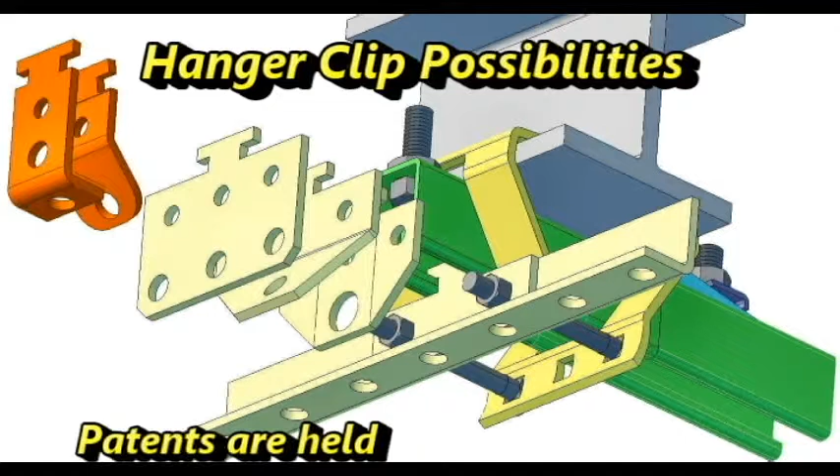The engineers of NuClamp have developed a number of construction attachment devices that provide many new solutions for making connections to steel members. Most applications are found inside of steel structures. NuClamp products save labor and provide many new solutions to attachment challenges. These are all based on patents that we have been awarded.

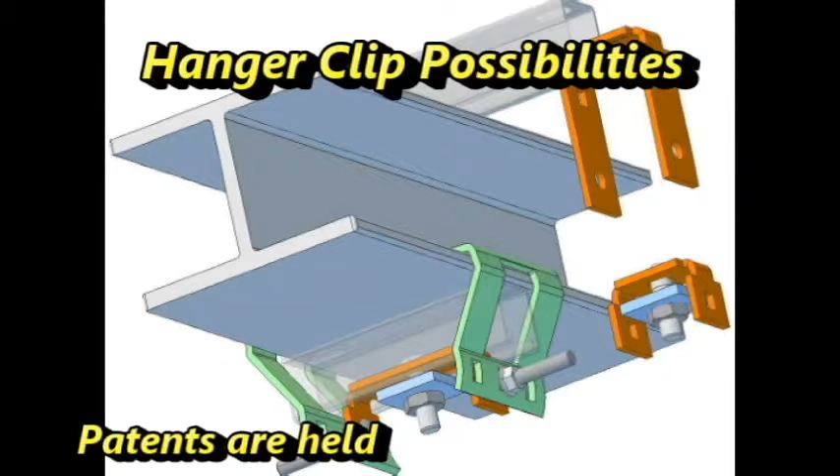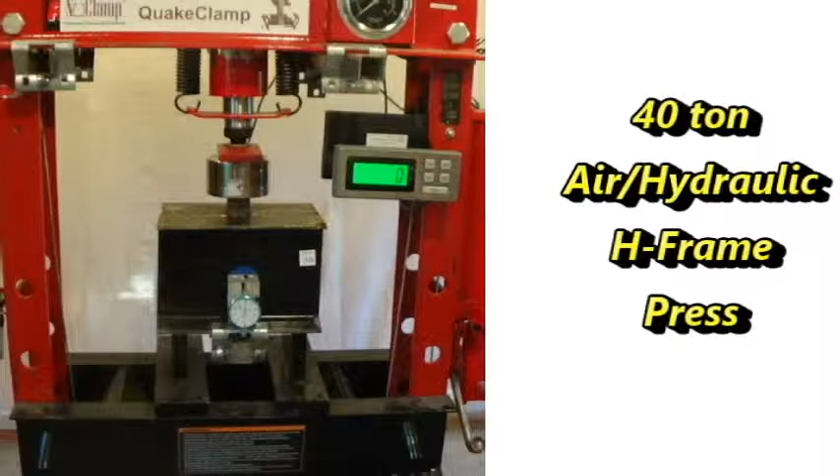The following video is one of a series that features the testing and options for use for the different NuClamp products and attachment configurations. As part of this video, new and better methods for hanging and attaching members to steel beam structures are presented. These are made possible by combining our beam QuakeClamp along with our new family of hanger clips. For testing, we use a 40-ton air-over hydraulic H-frame press along with a number of special fixtures to apply forces that best emulate real-world loads.

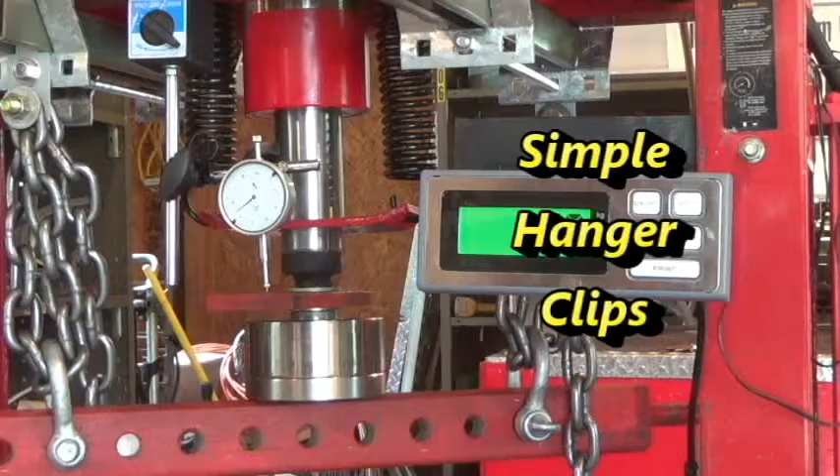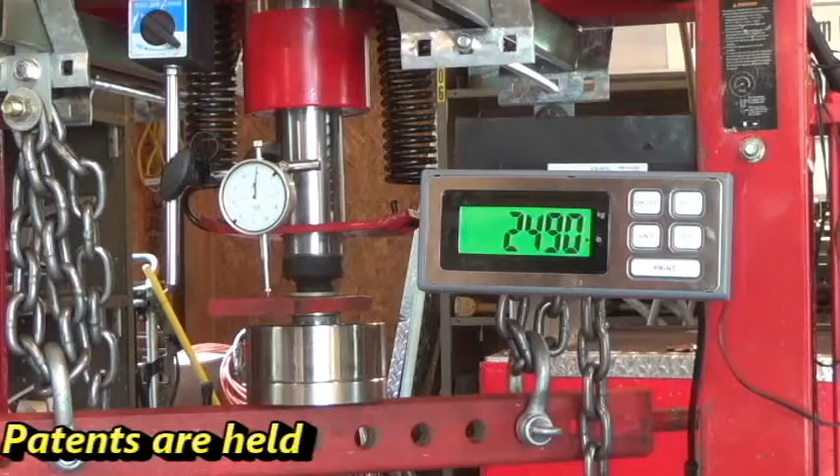We use a newly calibrated 50,000-pound load cell attached to the press ram. A digital readout displays the force. This is seen on the right side of the load cell. Dial indicators show movement. We maintain a complete video record of all tests with pounds of force recorded at each 10/1000ths of an inch movement. Data from the videos are charted and graphed in Excel workbooks.

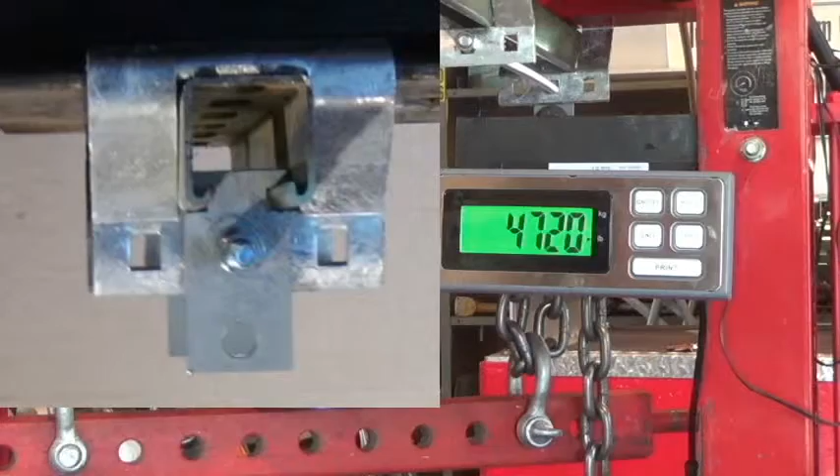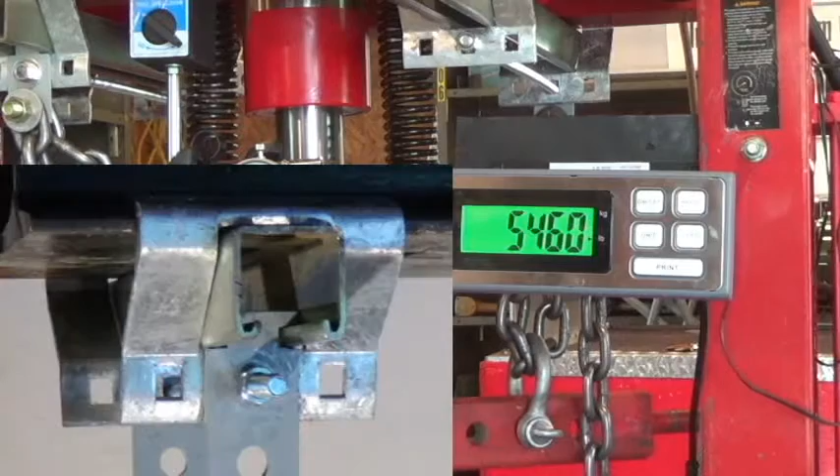This test is part of a series for our single strut QuakeClamp. This video shows how our simple hanger clip provides a strong loading capacity when used with a short or long piece of strut channel secured by our QuakeClamps. One bolt is all that is needed to attach the small size hanger clip to near the edge of an I-beam. Small does not mean light duty. The smallest hanger clip shown will support the full load of one side of the clamp assembly. We also will show more complex devices that extend the hanger clip's function.

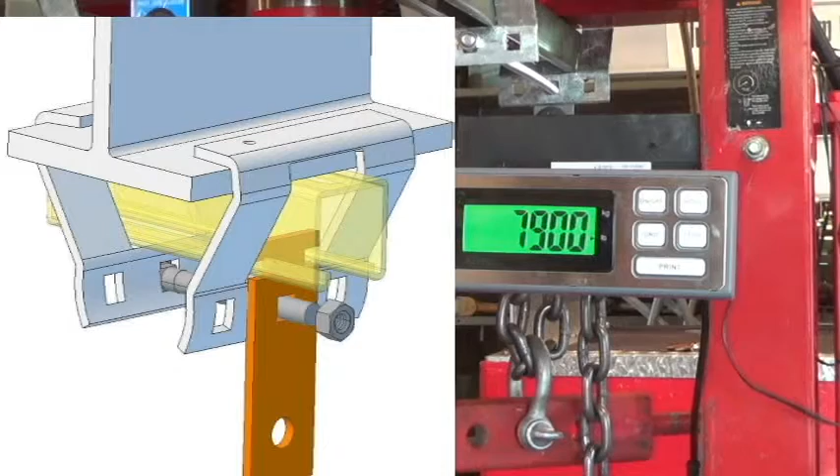In this first test, we inserted the notched end of the clip in the strut channel. The bolt passing through the center hole of the clamp that connects the two sides of the clamp together captures the hanger clip against the outside of the clamp. The load is mostly carried by the inside of the strut channel, which is held by the quake clamp. The inside of the clamp also contains the strut, so it does not deform where the hanger clip is positioned. One bolt on the hanger assembly holds as much as one side of the quake clamp.

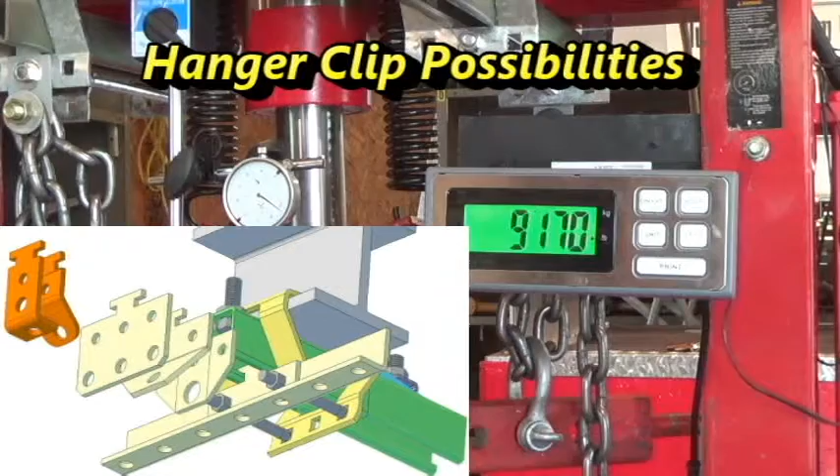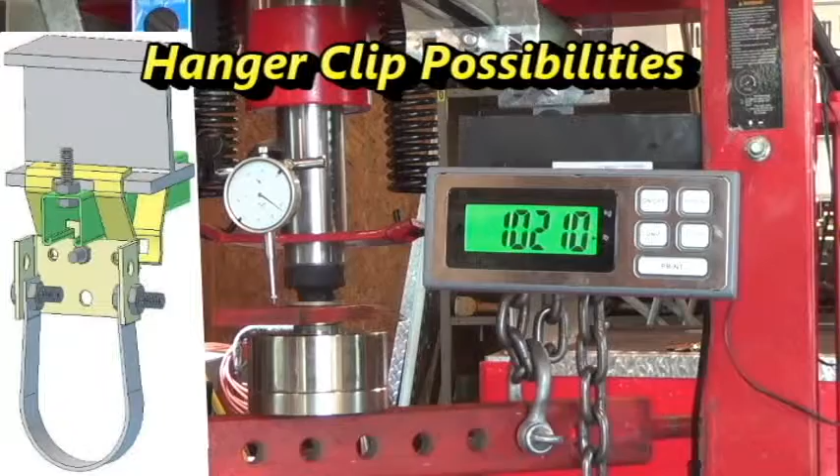Our testing showed an ultimate failure load of 12,800 pounds for two ends. This translates to 6,400 per flange side. A hanger clip that uses two bolts through the clamp provides more stability for loads to one side or the other. Special hanger clips are easy to manufacture to meet special needs. In other videos, we show ways to stop most sliding across the I-beam. This opens up new ways for attaching bracing as well as other opportunities for solutions for hard-to-solve problems.

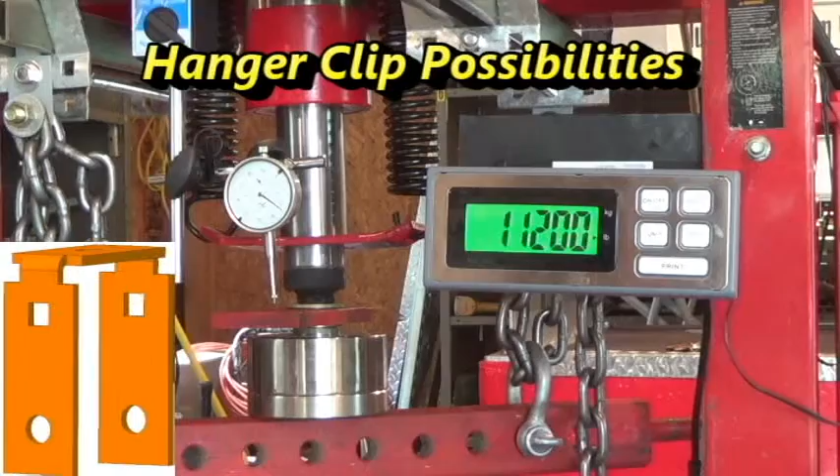In the test videos, the movement of the ram is displayed on dial indicators. The load in pounds is recorded on a spreadsheet at each 10/1000ths of an inch movement. In this test, the force is applied to a bar that pulls down on two hanger clips at one time. The measurements displayed are for two clips. While these clips were installed on separate strut channel, the same results would appear if one strut was used with a hanger on each side of the beam.

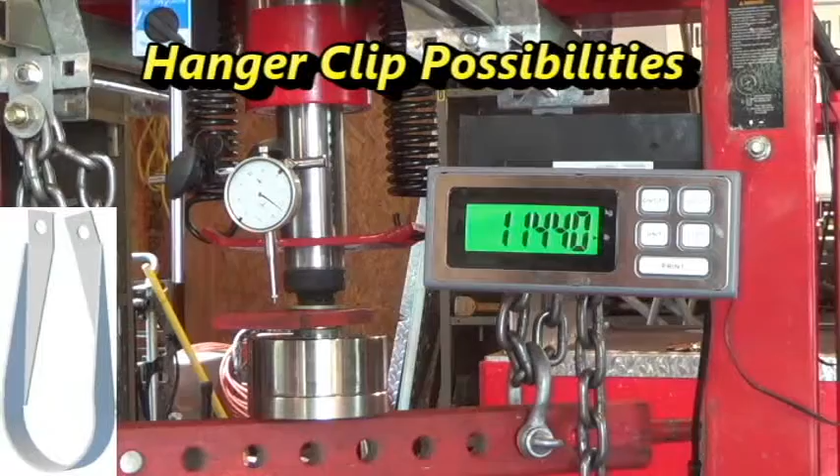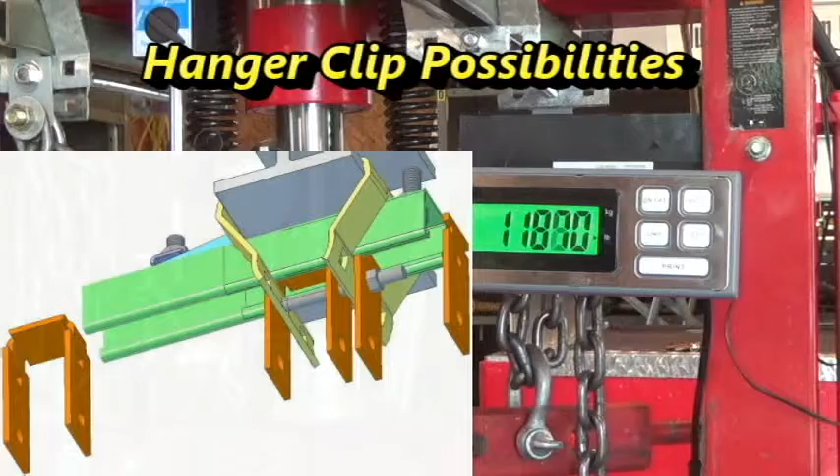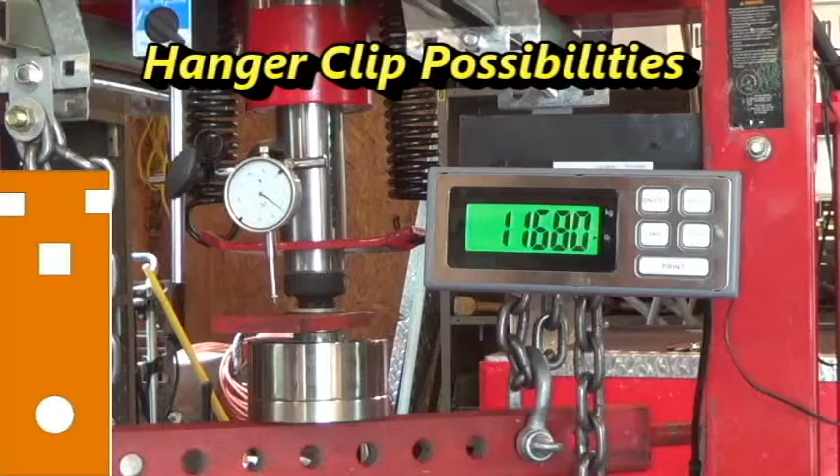Movement of the ram includes flexing of the press and other hardware members along with the taking up of slack between components. This makes up a portion of the initial movement, but at the upper end the movement is mostly due to the movement of the clamp, strut channel, and hanger clips. This way of using quake clamps along with simple hanger clips provides strong methods for hanging hardware in ways not otherwise available. More detailed pictures of how the clips attach will continue to be displayed.

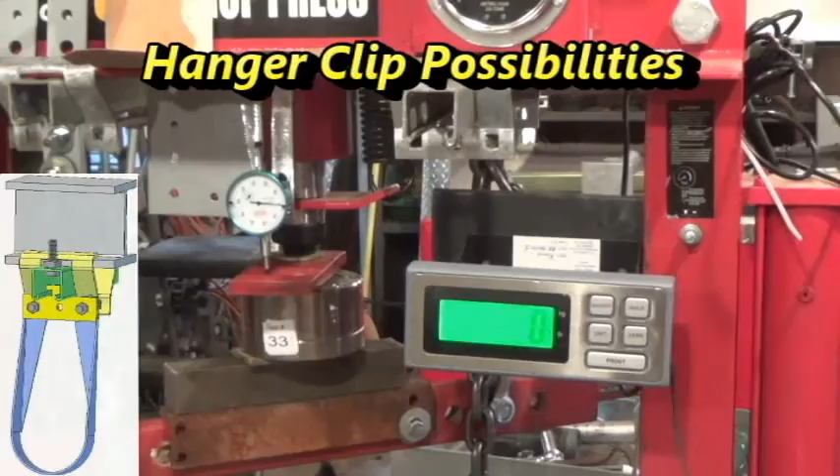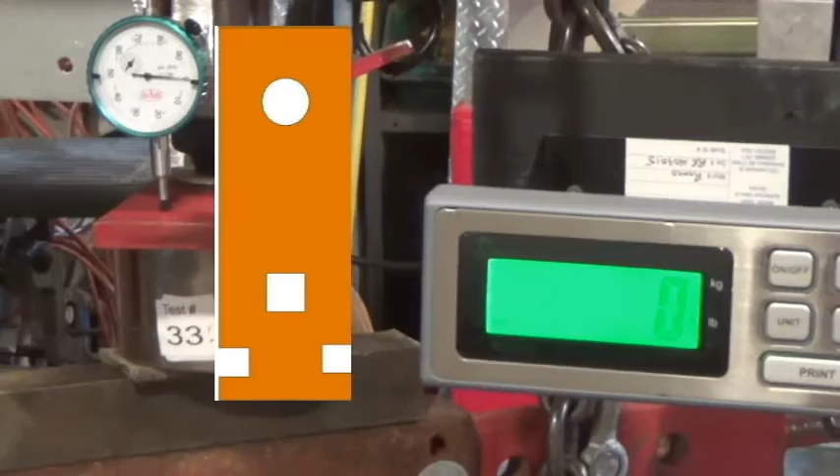The sample clips used on this first test had the hanger attachment holes located too close to the end, which allowed the hole to pull out. A simple design modification to increase the distance of the hole from the edge is all that is needed to fix the clip. In the second test, two clips are stacked together, which resulted in no damage to the clips or strut channel. The one hook end of the quake clamp failed at a load of about 6,400 pounds on one side of the clamp.

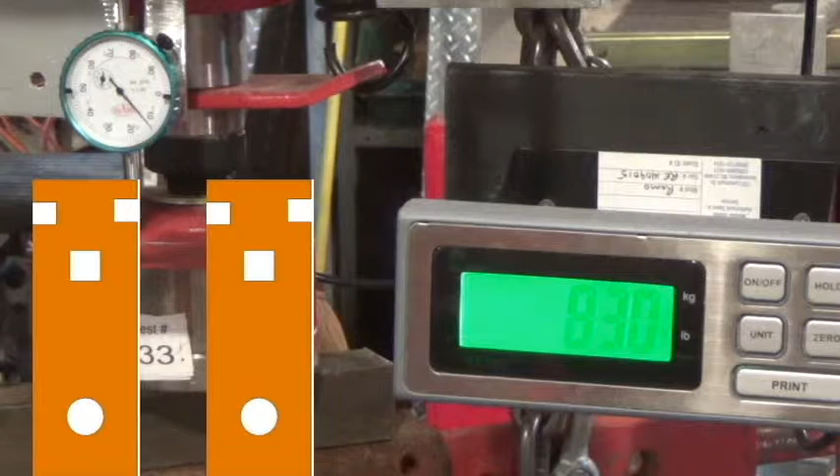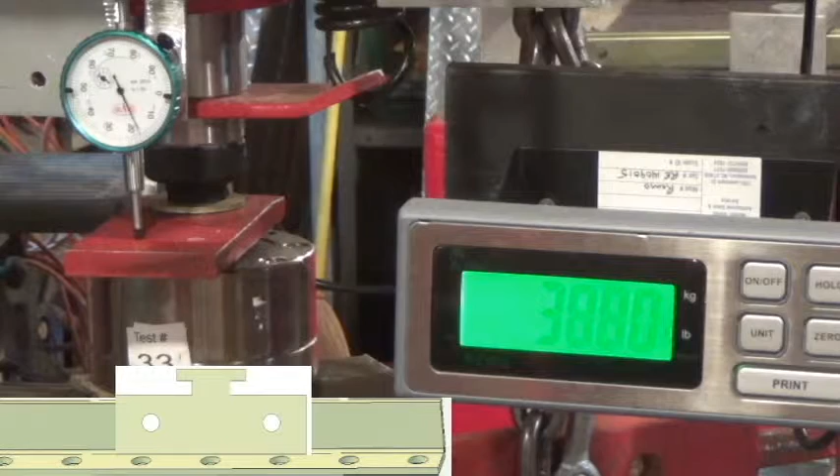A pair of basic hanger clips can be sandwiched with a flat object between. This is a way to hang special shapes like an angle or a strut channel in a vertical position. The hole locations in the hanger clip are located to exactly match the standard spacing for the slots in the strut channels. This obviously is a way to strongly hang another strut channel vertically from the edge of an I-beam. Other examples of design variations for NuClamp hanger clips continue to be shown. One clip that uses 2 bolts through the clamps allows other members to attach items such as this angle, which can have special lengths and hole patterns fabricated as needed.

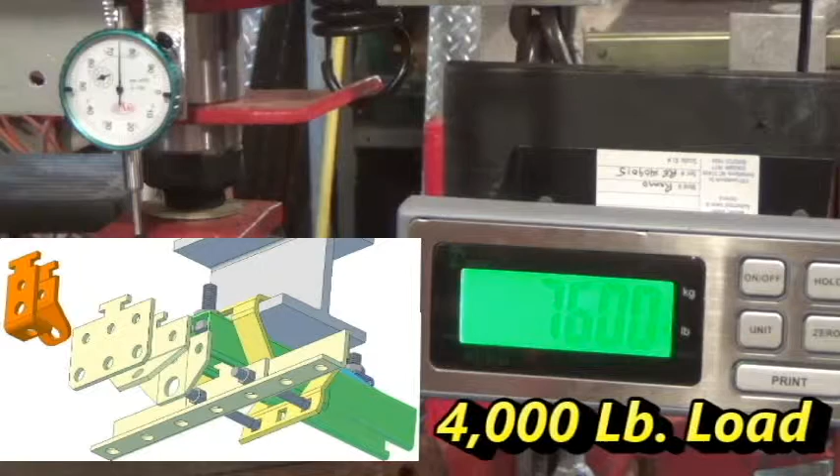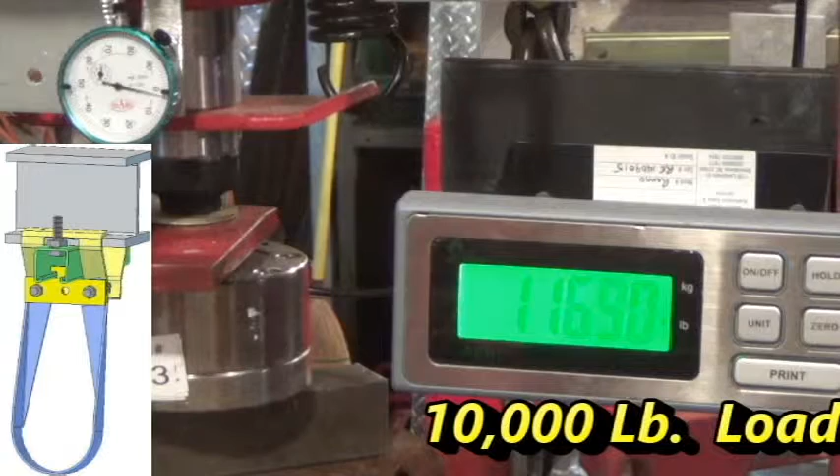The load display is difficult to read due to reflections, so key loads are displayed. Here are more ways straps can be used with hanger clips to hold a variety of load shapes and sizes. They all use the same way to interface with the clamp assembly. The hangers range from simple single bolt styles to more complex assemblies. While most of the clip designs shown are displayed on one side of the beam, attaching to both sides can be used to create configurations needed for a variety of attachments and for twice the overall capacity.

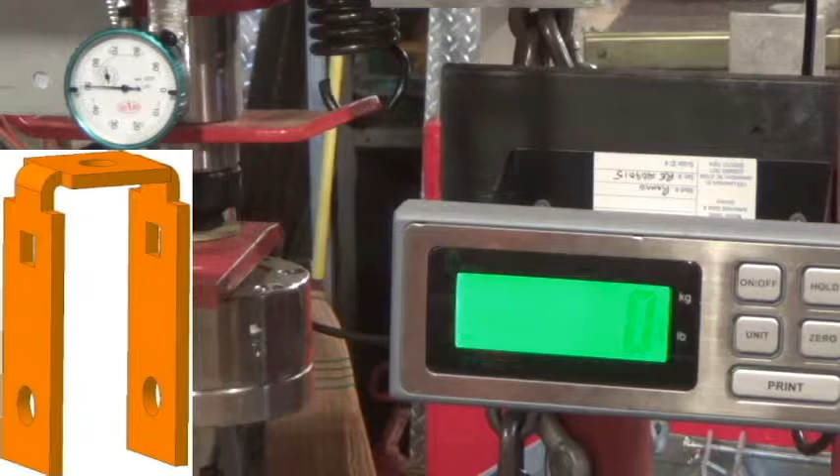Our U-shaped hanger clips provide a number of other options. It includes not having to be located just against the clamp. These clips, in addition to providing ways to hang loads, can be used as a connector between the clamp members by using 2 short carriage bolts to eliminate the need for extra long bolts. When a 1/2-inch carriage bolt and nut with a square washer is added to a U-shaped clip, a stop is created that reduces sliding of the whole assembly.

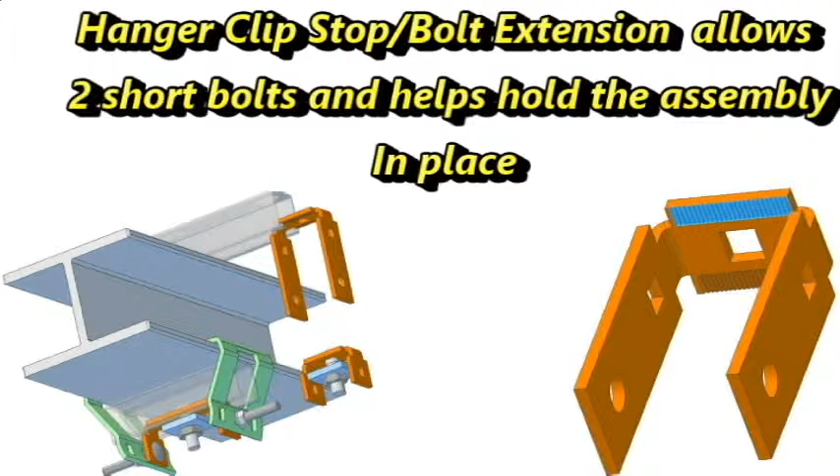For extra gripping by a stop, teeth can be added to the inside of the U-shaped clip. U-shaped hanger clips can slide into strut channels and be secured to one clamp side or remain independent of the quake clamps. The single bolt width clips will work equally well with our new combo grip clamp that is still being developed. Excel spreadsheets and graphs are available to use to evaluate the data for various configurations that use the quake clamps and accessories. Each workbook contains pages for different loading configurations for loads in different directions.